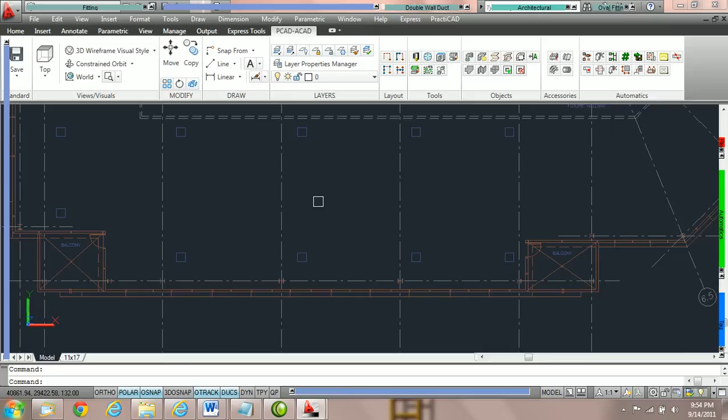First thing we need to do is get a full duct line on the drawing. I'm going to zoom into this area here. Let's go up to our workbox and select the zone. I'm going to choose the zone supply for new fittings, and then choose a specification. Here I'm going to choose 6-inch water gauge and apply it to new fittings. Remember that your specs and zones might be different on your screen than those of this exercise.

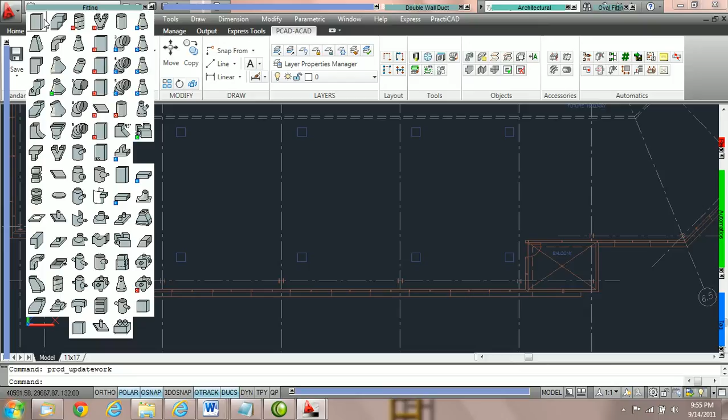Once you've selected a zone and a specification, let's go up to our fitting bin and grab a piece of rectangular duct. I'm going to click once, then come over to our fitting parameter box and size it to be 42 by 24, and put the elevation bottom at 15 foot.

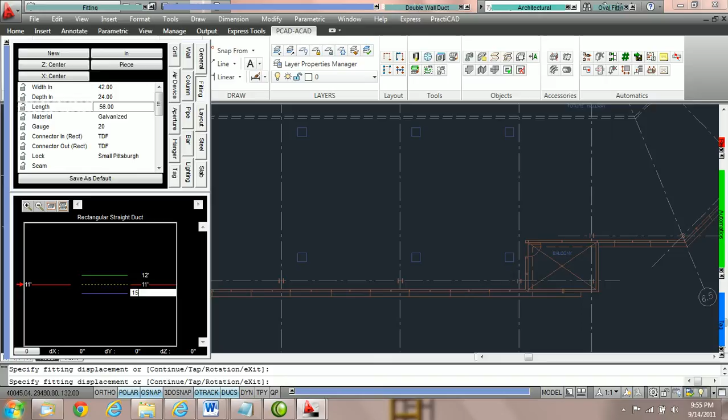Now we're going to zoom and pan into the drawing between these girders about midway, and just click once to place it on the drawing. It's now asking us for the rotation. I'm going to click again to accept the rotation.

Now the routing parameters are in the bottom, new piece exact. We're going to hit P spacebar for piece. That is not necessary if you're already routing on piece, however, if you're starting to see it routing on exact, switch it to piece. Once you've done that, I'm going to click once to place it.

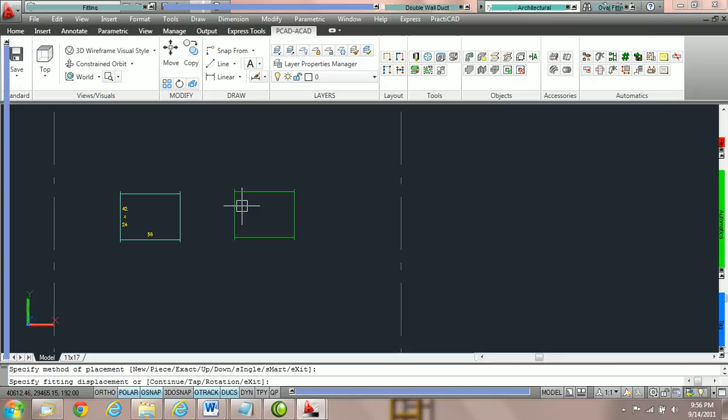Next, you're going to hit C spacebar for continue. We're going to add 2 pieces of duct on the drawing by clicking twice, so we got 3. Then go into your fitting parameter box and click on the finish length transition, or a transition you'd like to use, then click once to place that.

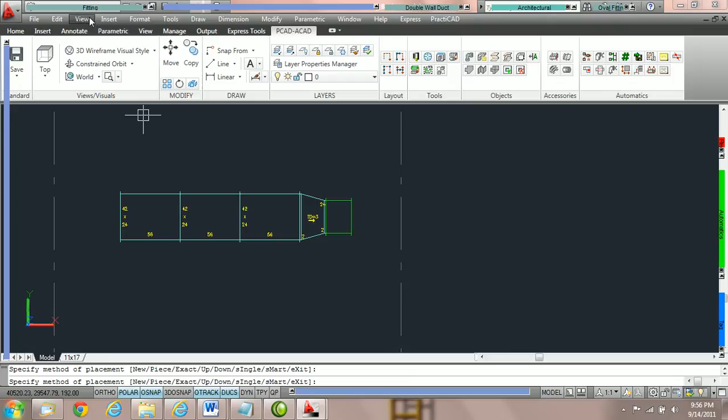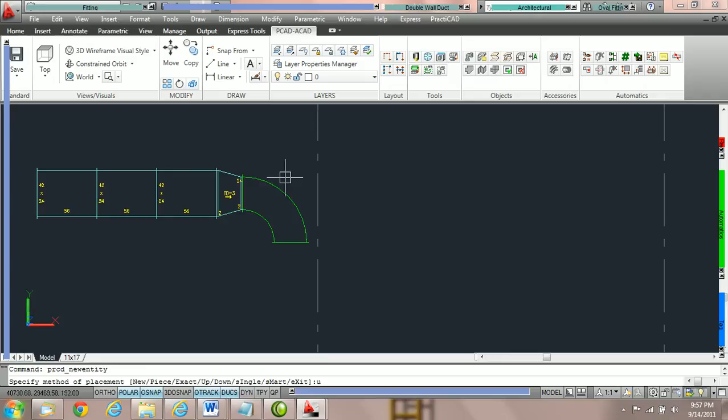Next, grab a radius elbow or a square elbow, whichever one you want. Probably best for this exercise, we'll grab a radius elbow. Then I'm going to pan the drawing a little to the left, and switch the routing method by hitting U spacebar, and route a little duct line about this many fittings. Remember to hit escape to let go of the last fitting. So take your time and draw out this duct line.

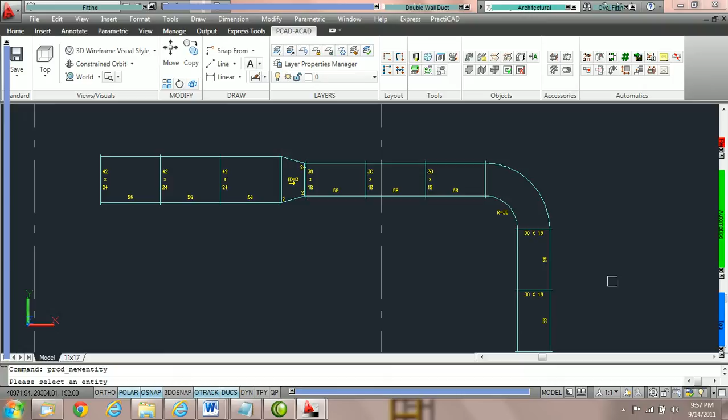Once you've got your duct line set, let's change the entire elevation of the whole duct line. But before we do that, go into your tag bin and grab your elevation, 0 no leader tag. I'm going to click on it, then click on the first fitting in the line, and place that tag down on your drawing.

Notice that if you have a snap point highlighted, it's actually going to snap to that spot. I'm going to click here, and we're going to put another one. You can see how the nearest node is snapped, so the tag wants to snap there.

If I want to place it here and have it ignore that node, I'm going to hit F3, and that's going to shut the snaps off. You can also come down here and click O snap, but I'm going to do that just for one command. You don't have to. I'm going to place that tag down on the drawing, and then hit F3 to turn snaps back on.

So notice we should have snaps on and polar on for the rest of this. But we've got two tags on your drawing. Now I'm going to hit escape and let go of the tag I was holding.

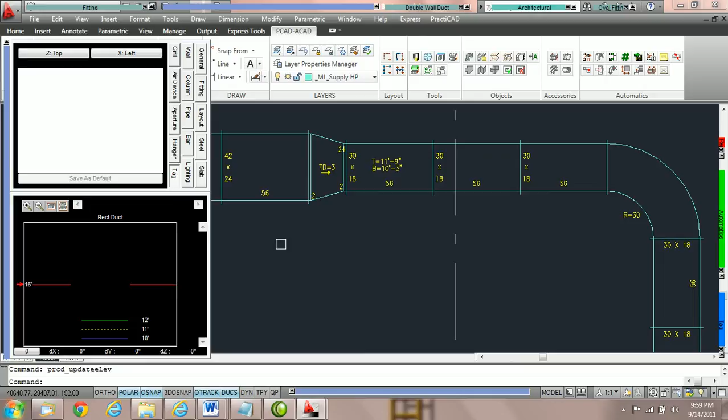Let's click on the first piece of duct and go to the elevation box and change that elevation to 10-foot bottom and hit enter. When you do that, you should see that duct is at bottom 10, and it should have changed and edited the entire duct line all the way to the end, if you attached everything correctly.

If you want to pause, you can always highlight the duct line and go into your automatic bin and choose the duct line check automatic, and click on it. Make sure, as I've done here, that you've only got red marks at the ends, so there's no break. In order to do this exercise, make sure that there's no break in the duct line.

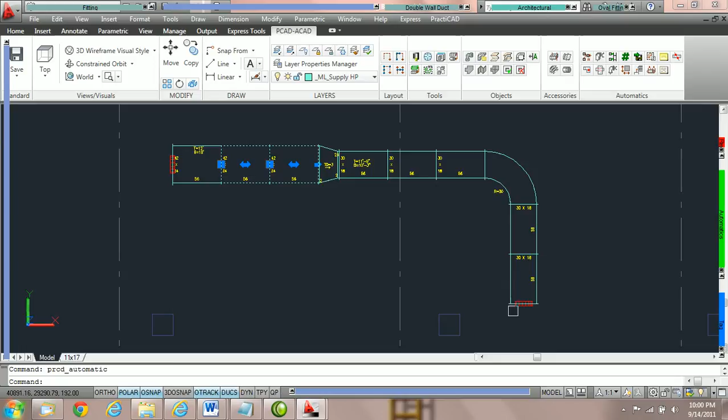Once you've double checked to make sure there's no break, go back into automatics and click duct line check again. But before you do that, make sure you're not holding anything. Notice if I click on these fittings and then click duct line check again, it doesn't make the red marks disappear.

However, if you hit escape and let go of everything on the drawing, then go back into automatics and click duct line check, it'll remove the marks. So we know we've got a duct line that's all connected here, and we've edited the duct line. Make sure you pause and edit the elevation, check the duct line, and then we'll continue with the remainder of this tutorial.

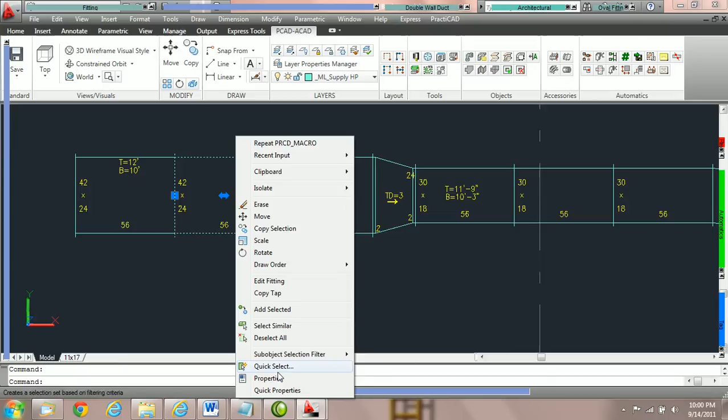The next portion, what we're going to do is click on the second fitting. Then right click and go to AutoCAD Properties, or double click on the fitting, whichever you prefer. Make sure the AutoCAD Property box is open, and let's change the width in to 36 and hit enter.

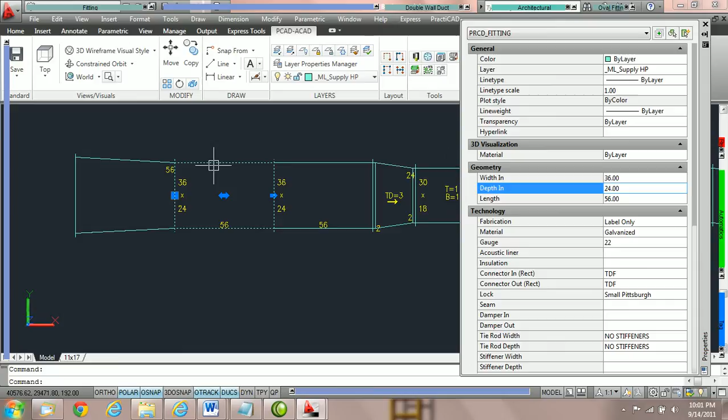Notice that because of the settings we have, change duct to transition, this transition has been added to compensate for the change here. Also notice that the duct line forward has edited. Notice we've got the arrow right here. The arrow's pointing in the direction we're going to be editing, and that's because we're holding the duct, if we go to the fitting tab, by the in joint.

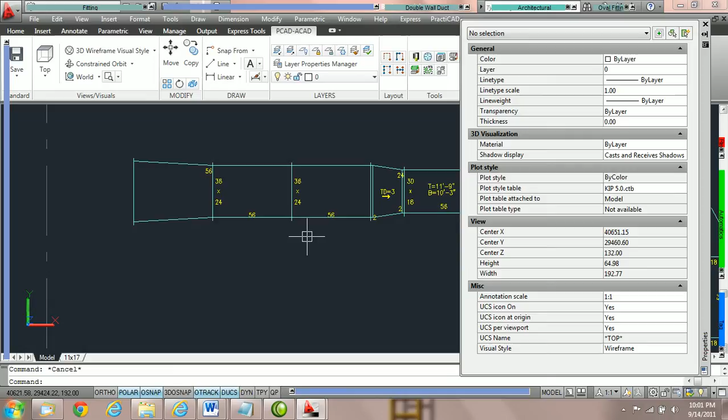So if we want to edit in reverse, hit escape and do an undo command. I like to use Control Z. I'm going to hit Control Z once, twice, and get it back to exactly where we were. You might want to try U spacebar for undo, but Control Z back. That was just to show you what the change duct to transition would look like.

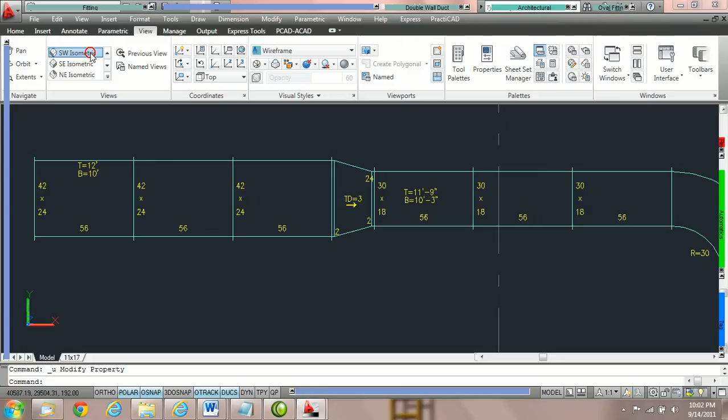Now let's practice editing the duct line forwards and backwards. What we're going to do for this is put your drawing in isometric view. To do that, go to View in your ribbon panel, and choose AutoCAD Southwest Isometric. Once you've got it there, let's zoom in on that section of the drawing.

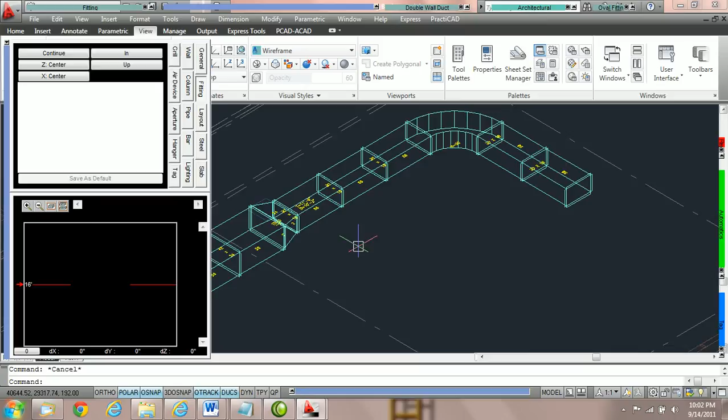Now you should be looking in the fitting parameter box and seeing that we're holding by the in joint. When you are, lock your fitting parameter box open by clicking this little down arrow, as I've done. Then pan your drawing over a little bit so that you can see the duct. I want to focus on the transition.

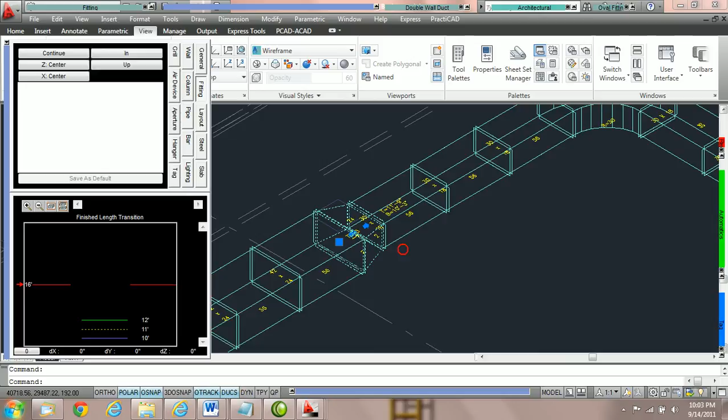Click on the transition. Make sure you're in 3D or 2D wireframe visual style, as I am currently. See, we're in wireframe. If you're not in a 3D or 2D, you're not going to see the arrows and the nodes when you're working in a realistic view. So it's important to make sure you're in 2D or 3D wireframe. You should see an arrow pointing in the direction that we're going to edit. It should be pointing forward.

Double click on that transition and change the top change to 12 or something high, and hit enter. Notice that it edits the duct line forward when you do that. Then hit top change and make it negative 12, so you can see we're editing the duct line forward. Now click on top change and set it back to 0.

Now to edit in the reverse direction, I'm going to zoom out just a little bit so we can see these fittings, go up to the fitting parameter box and switch it from the in to the out. When you do that, make sure the little blue arrow has changed direction. It's no longer on the out joint, it's now on the in joint, pointing in the opposite direction because that's the direction we're going to edit in.

So now take the top change and change it to 12 again, then change it to negative 12. Notice that we're editing the ductwork backwards. So we can edit forward or edit backwards. Once you've done that, top change back at 0.

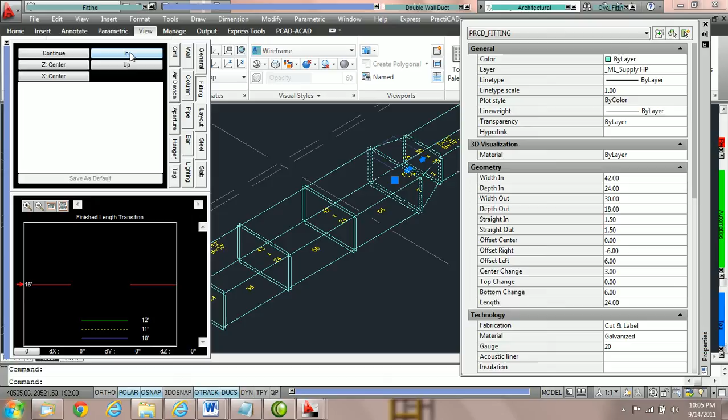Go back to the fitting parameter box and make sure we reset everything to hold by the in, because we want to edit for the rest of this exercise duct line forward. Once you've done that, you can click the up arrow to close your fitting box. Now we're going to put this back into top view. I'm going to do that under the View tab in the AutoCAD ribbon and hit top.

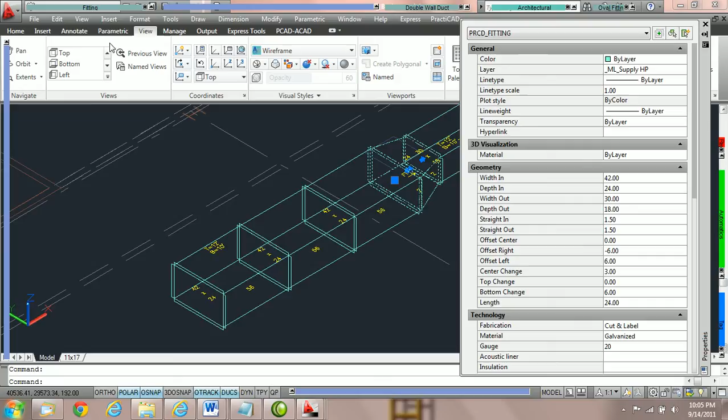Now zoom back in on your drawing. What we're going to do is click on this first piece of duct and edit the properties by taking the width in and changing it to 36, then hitting enter. When you do that, you should see that it should edit right up to the transition.

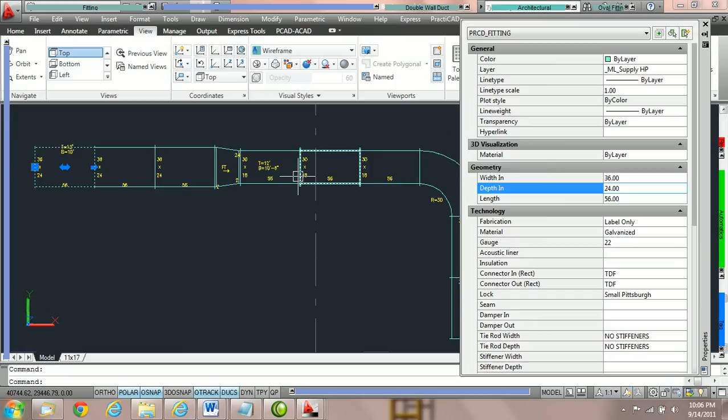That's because we have the button that says keep size at transition unchecked. So what that means is we're not keeping the size. The keep size at transition option will change through the transition, but currently we're having it just change up to the transition.

Now what we're going to do is click on the transition again. Make sure only the transition is highlighted. Change the width out to 24 and hit enter.

When you do that, you should see that PractiCAD has edited through the duct line, because we have the button keep size at turn checked. So the change we made should have edited all the way through the duct line. If we uncheck that button, the change would just go from the transition all the way up to the elbow. But here you can see how that option works.

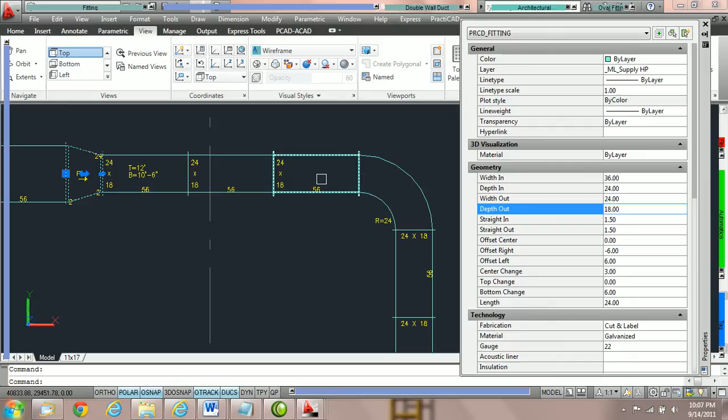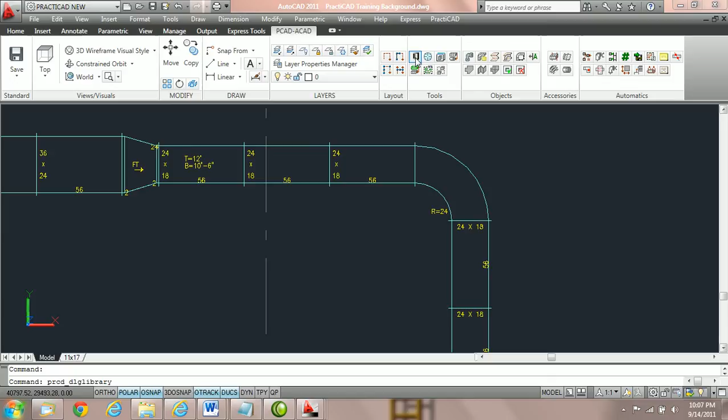So to get a feel for how it would edit with those options turned off, let's hit escape, go back into our PractiCAD ribbon, click on the library icon, and let's change the ductwork options by clicking on ductwork on the left.

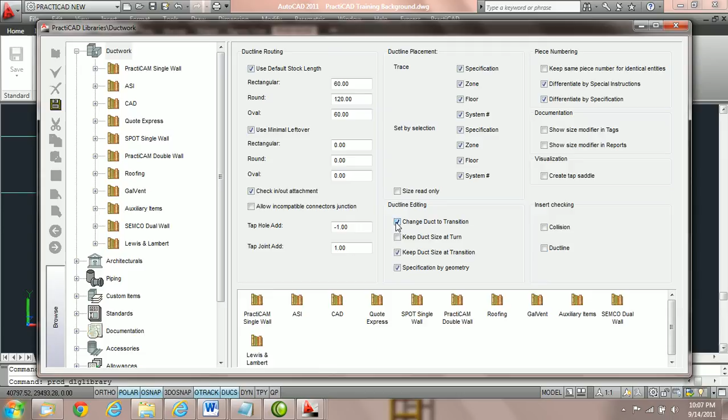Let's check 'keep duct size at transition' and uncheck 'keep duct size at turn' and uncheck 'change duct to transition.' Then hit the save key and exit out.

Now click on the fitting, the second fitting in the duct line, double click and open up your property box. We've checked keep duct size at transition, which means the change should edit through the duct line, through the transition. We've also unchecked change duct to transition, which is the option that changes the fitting before the change to a transition.

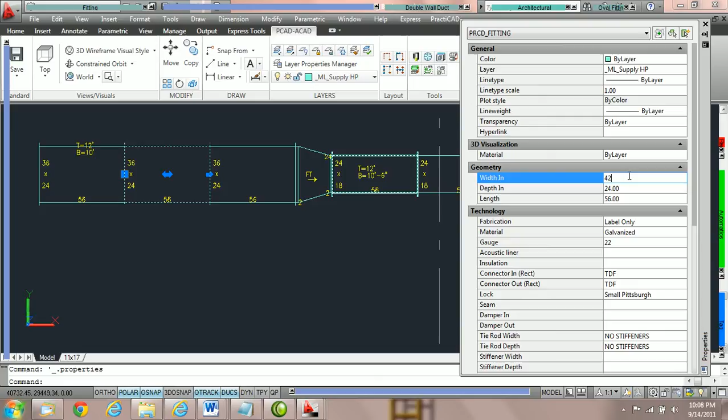So if we do these settings and go to width and change it to 42 and hit enter, you should see it edit the entire duct line. Notice it's only editing up to the elbow though.

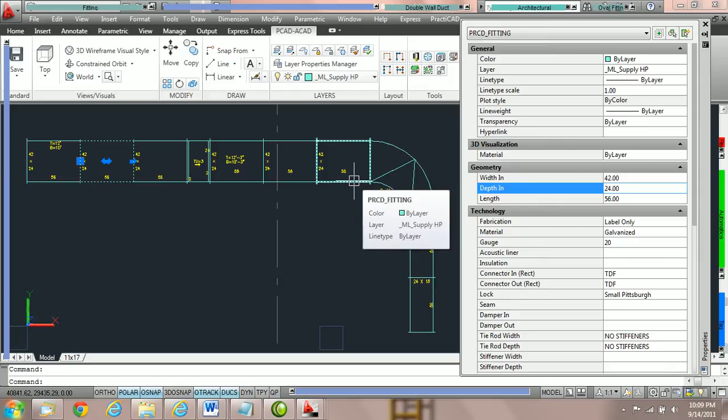The option that says keep duct size at turn, we've unchecked it, so it's editing backwards and forwards through the transition up to the nearest elbow. You need to get used to playing with these options so that when you edit, the duct does what you want it to do.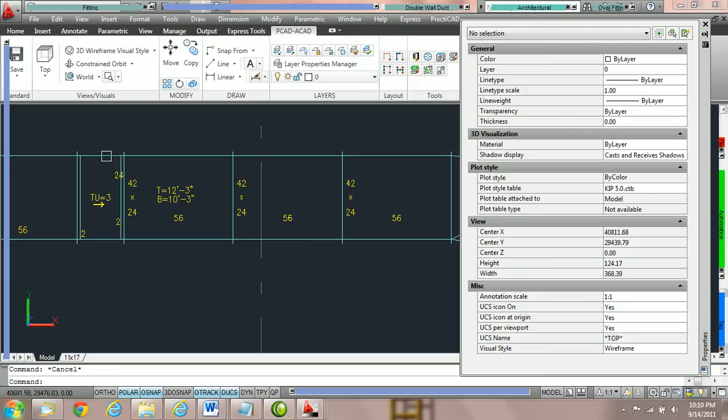The last changes we're going to make: let go of the existing fitting, zoom into the transition, click on the transition, and take the width out and change it to 24, and hit enter. Once again, that change is only going to go forward down the duct line up into the elbow.

Now hit escape to let go of the transition and click on the fitting directly after it. Let's change that length to 24 and hit enter. Notice that the label only is going to switch - the fabrication level is going to go from label only to cut and label when you hit enter.

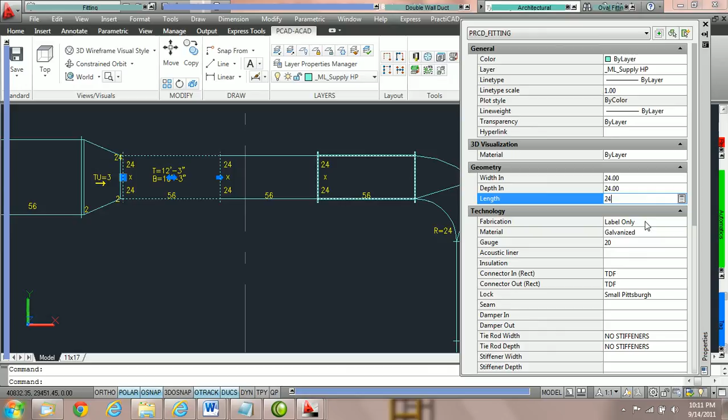Now there are other tutorials on editing the text, so if your text gets crowded, there'll be other exercises on how to change it.

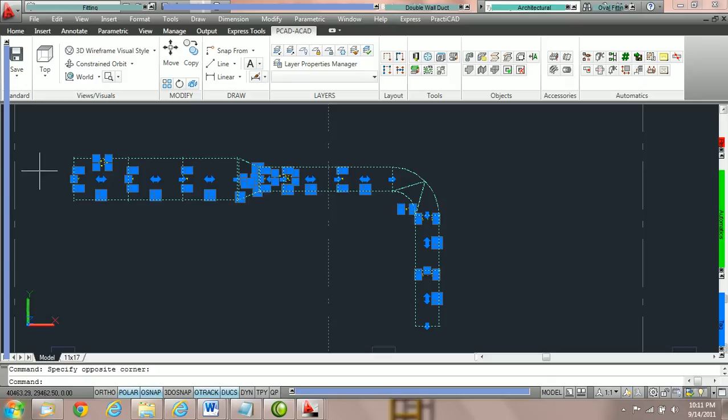But for right now, highlight your duct line, and then click on this button that says Replace Tags All Duct in your automatic bin. When you click on that, it will clean up the text to fit.

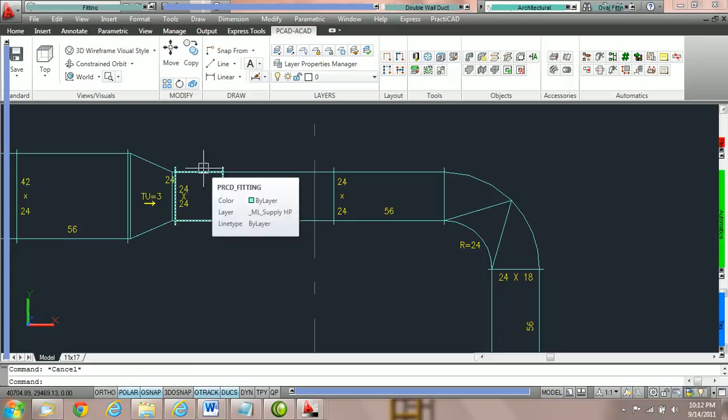Now what we're going to do is move this little piece of duct down the length of the duct line up to the elbow. Once you've edited your text, click on the duct and notice you've got a double arrow right here at the short piece. You need to left click once and then you can drag your mouse in the direction you want. I'm going to go all the way to the end, right to here.

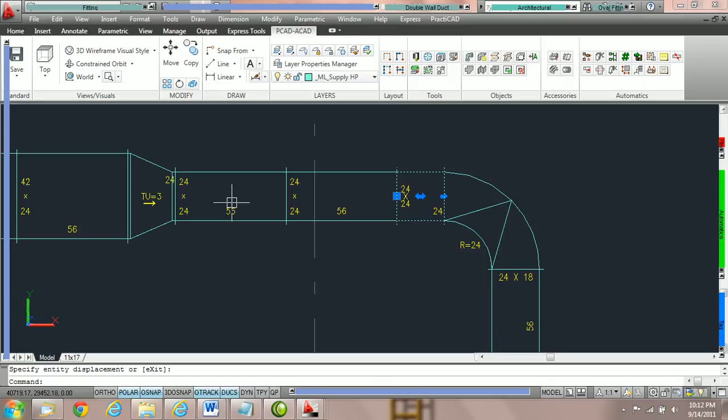Notice it's even going around turns, but just go to the end right before the elbow and click. That'll move the little piece of duct all the way to that elbow. That's the exercise on moving short joints.

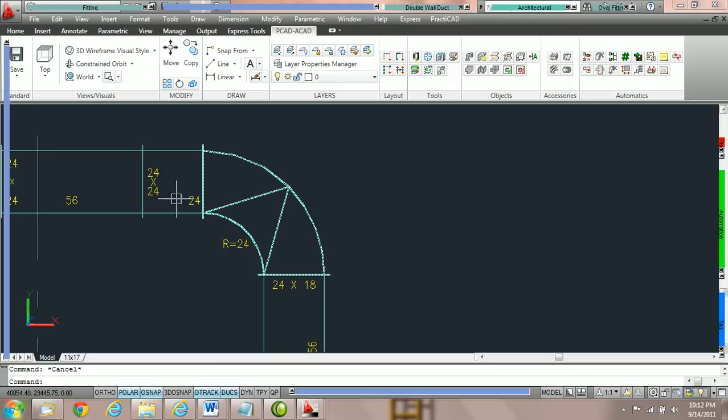One thing we're going to do now is use a routing method to route so that we've got one fitting in between. I'm going to highlight the last two pieces of duct on the line and delete them.

And then we're going to grab a radius elbow. Notice that we don't see the elbow on the drawing right now. Whenever you don't see an elbow, it either means ortho is on - and currently ortho is not on - or that we are on continue and the duct is snapped to the last fitting we worked with. If we zoom out, you can see the elbow is right there.

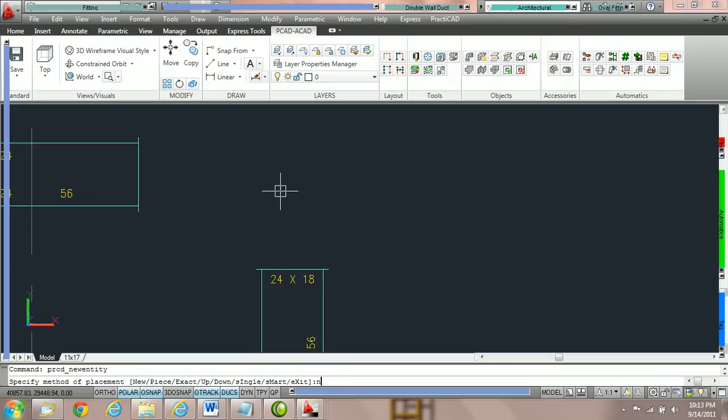So whenever you don't see a fitting, you need to make sure ortho is off and make sure you're not on continue, because otherwise every time you pick a fitting it should be on your crosshairs. So here we're going to hit N spacebar for new.

And then we're going to click once for this line. We're going to switch it to M spacebar for smart routing method - you can see M spacebar on my command line. And we're just going to drag our cursor right here. When we do that, it should route using the method smart.

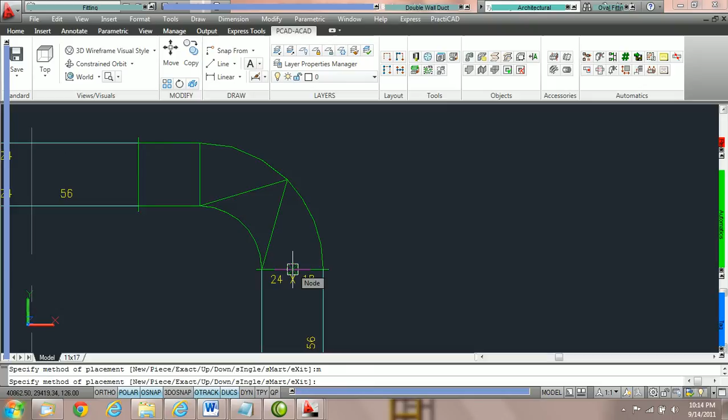You can also use I spacebar here for single - it's going to do the same thing. So we're going to switch it to M for smart or I for single, and just attach it right here. When you do that, you should have one fitting here, and we do - we have a drop cheek elbow on my exercise with a 24-inch straight.

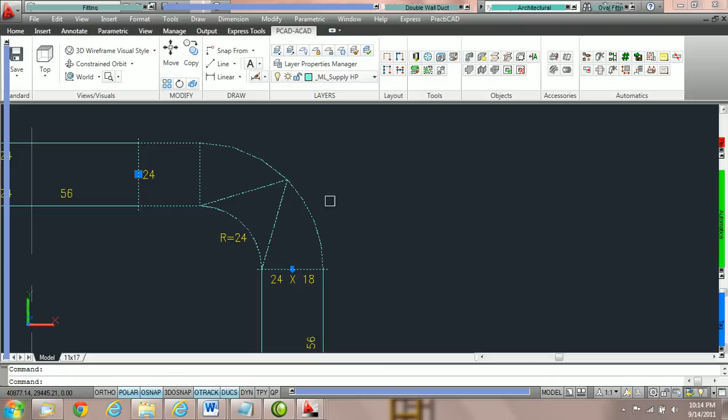It might be different on your screen, but that's the way to move short joints and then edit the duct so you've got one piece. That'll conclude the exercises on duct line editing.